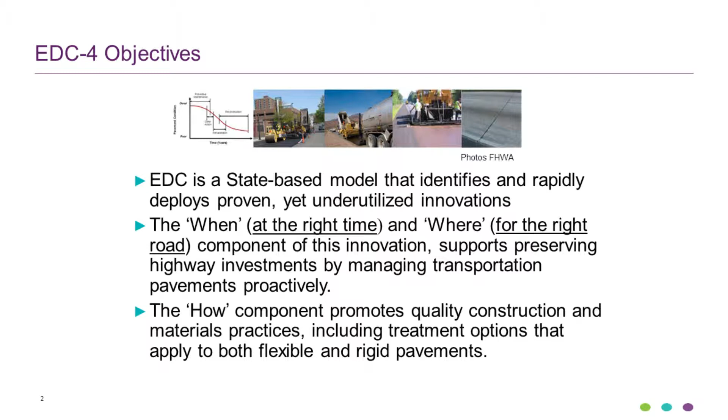Back to the objectives, we really wanted to base this Every Day Counts initiative on state-based models and identify a rapidly deployed proven technology. Pavement preservation is already a proven technology, but yet underutilized - whether it's specification related, training, or construction related issues - and we really wanted to push Every Day Counts on when and where to assist with this.

When and where - when is the right time and where is the right road. These are things most agencies struggle with. So that's the direction we went, as well as the how-to component to promote quality construction. Oftentimes when projects failed, we never did them again, so that's why we're going back on the how-to, to try to correct those actions.

My emphasis here is on web-based training. Everybody likes going to day-to-day trainings, but with our young millennials coming in, people need some kind of web-based training they can do on their own time. That's really our focus.

4 or 5 years ago, Federal Highway worked with ISSA and created the preservation training for our asphalt pavements. Great course, I can't say enough - get a chance, go to this website. It's excellent, not very long. People can take it on their own time, and it's a great source. A lot of innovations, a lot of photos. We spent a lot of time and money creating this course, so I really recommend it.

Back to what I'm supposed to talk about - the concrete. We went another direction, wanting more of an NHI type of training class. Oftentimes NHI courses cost money, but guess what - we're not charging anybody to take this training. Right now we're going through Adobe Connect issues because we're about 95% complete, as our software isn't compatible with the person that constructed it. We're getting those things taken care of, and hopefully soon this will be out for people to take, free of charge.

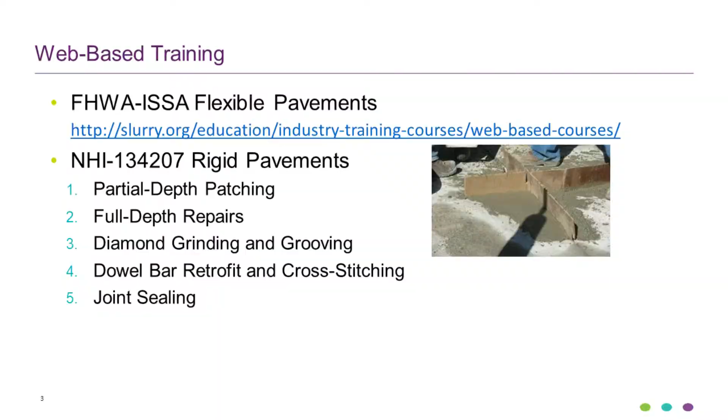All you've got to do is Google search NHI 134207. There may be A, B, C, D on different things, but they're out there. What will they cover? Partial depth patching, full depth repairs, diamond grinding and grooving, dowel bar retrofit and cross stitching, and joint sealing. Each course will be an hour and a half long, and they're very useful, very friendly. We're also working on a Spanish version, and this will be out in the near future as well.

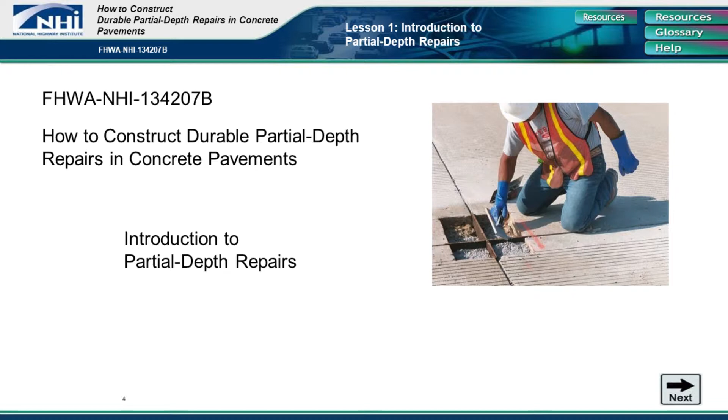So let's just take one of those - as you can see, partial depth patching. Let's go into it a little further. Here's a bit of the first slide, once they get into this web-based training website - this is often what the person will see when they get into it.

The first part is more of an introduction - it's lesson number 1, about partial depth. A little bit about the background - why did we choose partial depth repairs? We want to make sure we're using the proper techniques, giving them the background of when to apply partial depths and why to use them on that particular distress we're having in our concretes.

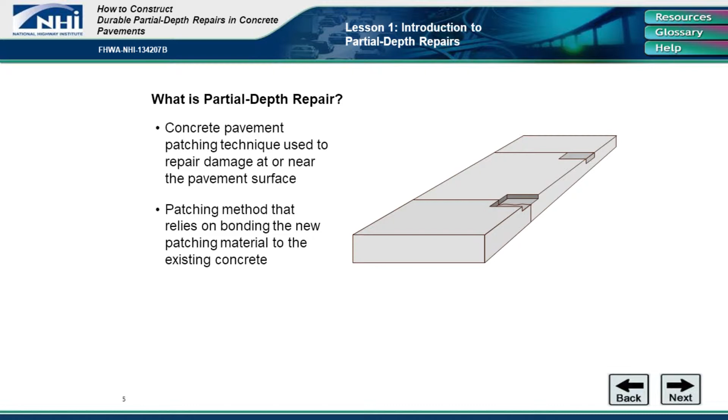So that's a little introduction. Then we go into what is partial depth repair - basically that technique to repair the top one-third of the concrete pavement. Then it goes a little further, on what types of pavements partial depth repairs can be used on. They can be used on jointed, reinforced, or concrete overlays themselves - it's not specifically one or the other.

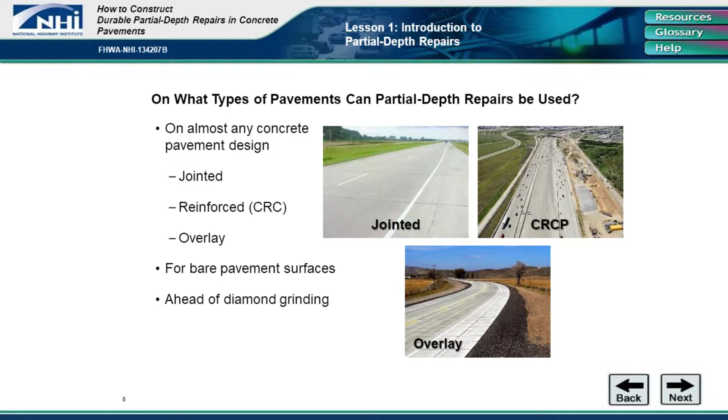For bare pavements, as well as ahead of diamond grinding techniques, then we talk about the problems of partial depth repairs.

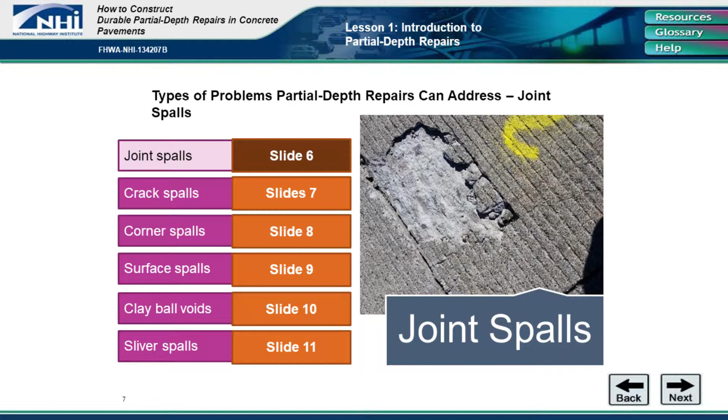Oftentimes, it's the incompressibles that get into those joints—the sand, the fine materials that get in and break up that material, and that's why we have partial depth repairs. As you can see here, this is each one of them that we talk about within this first course. We talk about joint spalls, crack spalls, corner spalls, surface spalls, clay ball voids, and sliver spalls. Who would have thought there's so many differences?

But we cover each one of them. We talk about best practices for each, in addition to the types of problems partial depth repairs can address effectively.

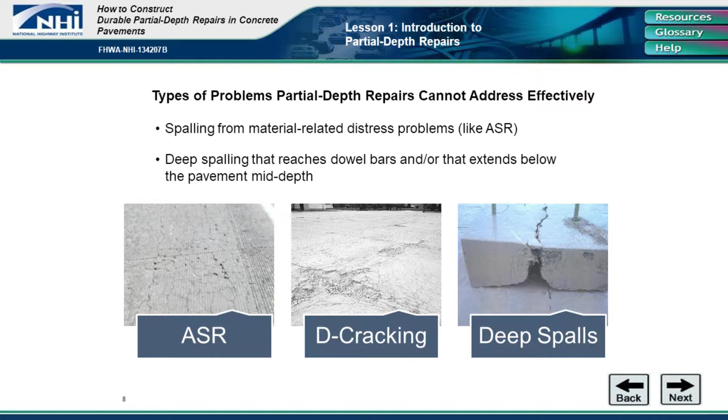For those inspectors that may or may not know this, do we need to do any partial depth repairs when it comes to ASR issues? Probably not a good candidate, as well as D-cracking, and not to mention deep spalls. If we've got something going down enough of that concrete surface, probably not a good candidate to choose.

As well as the inspector working with the contractor—we talked earlier today about quality. This is the first phase where we really emphasize quality into a particular project, by the engineer working with the contractor at the beginning, looking at assessing deterioration. The best engineer can identify the repair types, but it takes that workability to work with the contractor to itemize specifically what this partial depth repair will fix and what won't.

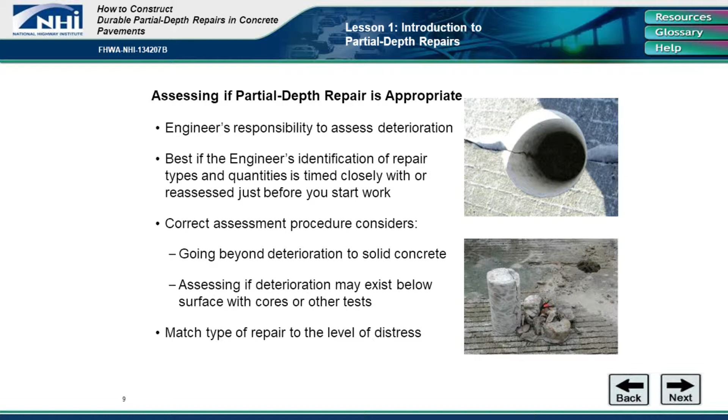Correct the assessment procedure considerations, going beyond deterioration, as well as going out and taking a core on top of that crack to see if it's coming from the top or from the bottom down. That's the things we want to look into when repairing those distresses.

Next, we have a little bit of scenarios—a little skit for the millennials. For this particular one, we have an inspector called Martin. He's going out there and he's going to look at these spalls and corner breaks. We give an opportunity for the inspector to choose what are the best candidates for partial depth repairs, and then we give them a chance to choose.

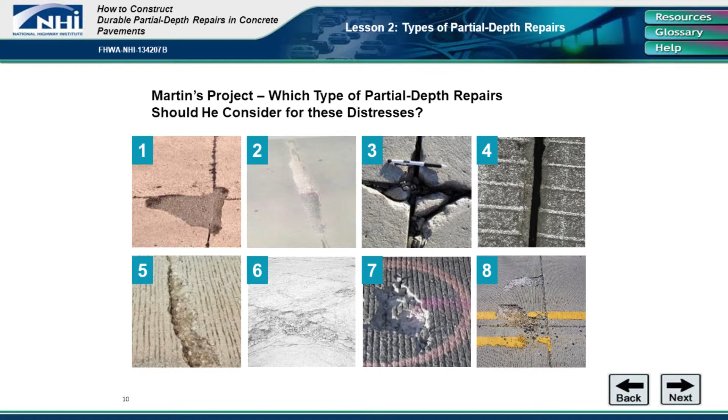And if you're playing along with this game show, you would see number 4 and 6 wouldn't be the most appropriate ones to do partial depths on.

In review and discussions with project inspection checks with the agencies, understanding that inspector prior to going out, knowing what they need to understand before the work gets done, is very important. Oftentimes we know they're going from one project to another, but understanding why they're going out and doing this is most important—having good project experience as well.

Knowing that the partial depth repairs are durable and perform well in a long-term strategy. Then, what is the agency's value? Well, their value is to adhere to those materials and equipment procedures. It's in their specifications, and that's what we talk about as well.

And then measuring quality indicators—what tests are they going to go into to validate the materials that are going to be used for those partial depth repairs? Things to consider.

As you're taking along these lessons and learning, you'll see 3 icons in the top right-hand corner talking about resource, glossary, and help. The resource has documents you can go into for further details on a specific item, as well as a glossary of pertinent terms. Then at the bottom, you'll see a paper clip—for this particular one, in orange, it'll be a PDF checklist available for further information for the inspector. So again, a very useful tool.

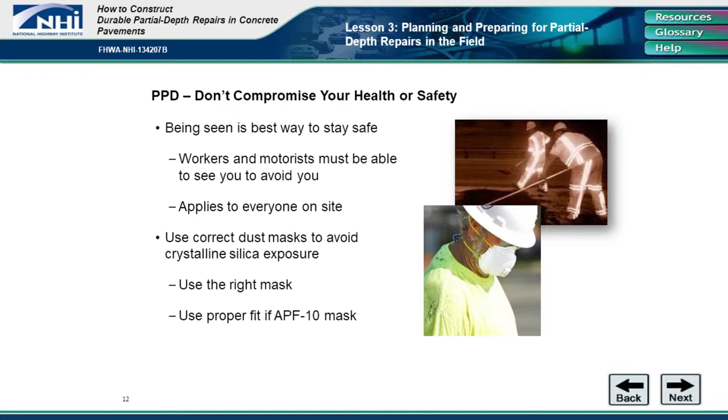And then when we're talking about especially concrete, what about those silica fumes and all those other things that are going to come up in the air? We want to make sure we talk about the APF number 10 masks that the workers are using, and nighttime construction, making sure they use the proper vest. We have 4 or 5 slides that go into more detail about that.

It aligns those inspectors to be well qualified when it comes to each one of those, so again you don't compromise your health and safety. That's very important, and we talk about that on each one of these preservation treatments.

As well as, what do we do if the boundaries of the mark are incorrect and job quantities do not match? Well, oftentimes early on in the projects we all mark them out, but then during construction they modify a little bit, change a little bit, but they're never consistent. Here in this section, we talk a little bit about it and how to properly mark it off.

We suggest a walk-through with the engineer to reassess what those conditions are, as well as make note that the project as-built drawings, for areas that have changed. We want to make sure we take that back to those designers so they understand what maybe they can do next time when it comes out to do one of these projects.

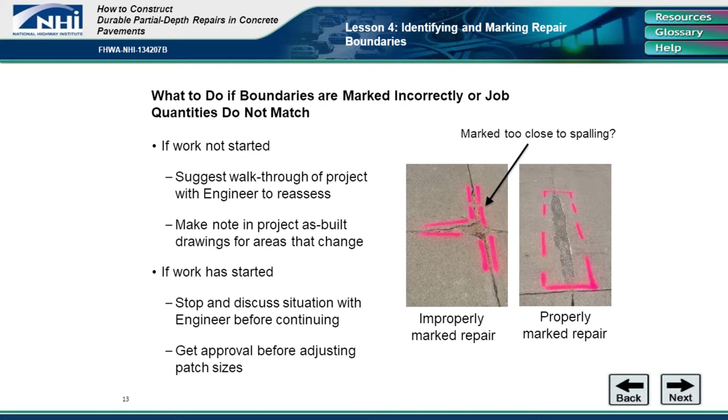Lastly, if work has started, we want to stop and discuss the situation with the Engineer, talk to them a little bit about it, and then get some kind of approval before adjusting. This is lesson 4 of identifying and marking the repair boundaries.

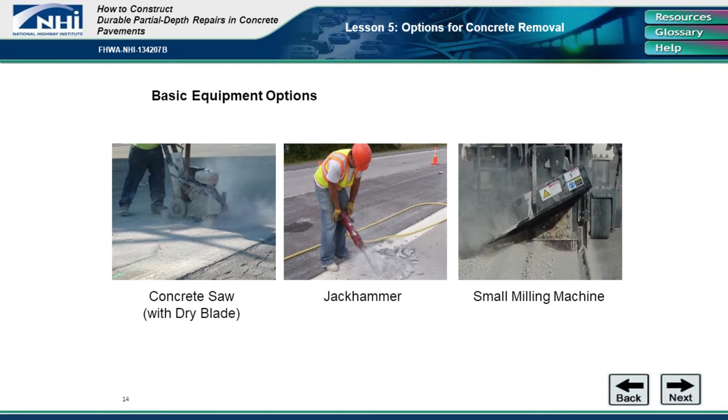Next, in lesson 5, we talk about the options for concrete removal. There are 3 different types that are often used: the concrete saw, jackhammer, and small milling machines. Very critical, we go in depth on each one of them, and it's very helpful.

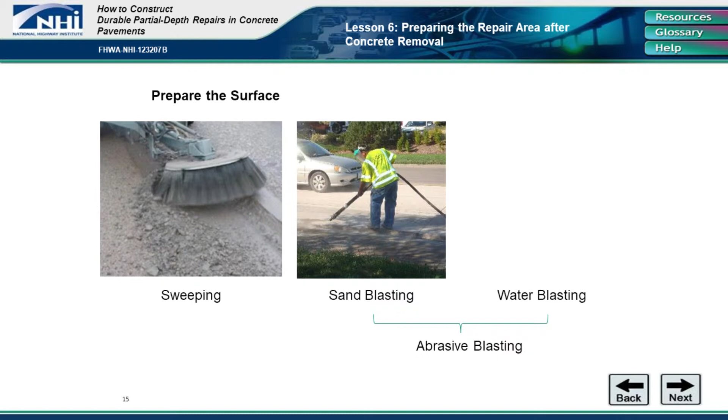In lesson number 6, we prepare the repair areas after concrete removal. First thing, we want to make sure we go out there and sweep them correctly. Then after that, we do some kind of sandblasting or water blasting. Oftentimes water blasting is probably the most appropriate, and the reasons behind that are less environmental dust and things like that.

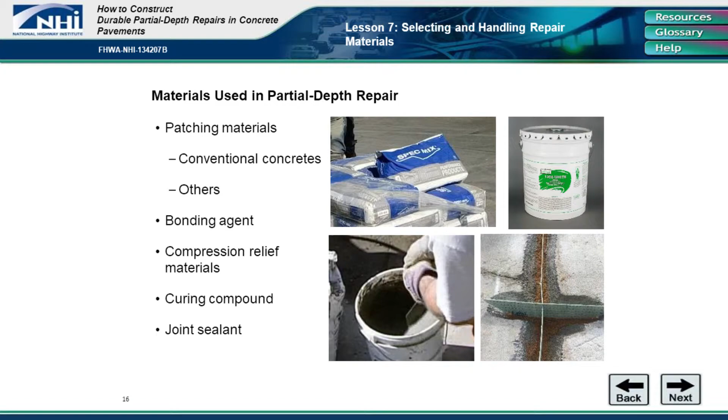Lesson number 7, selecting and handling the repair materials. First thing we talk about is the patching materials - probably the most important, that doesn't get enough information, doesn't get enough emphasis.

Next comes the bonding agent. Depending upon the material that's used, it's sometimes used, sometimes not. But again, how does one go about selecting what type of bonding agent? We talk about it. Also, we go into the compression relief materials, the curing compounds, and lastly, look at the joint sealing materials.

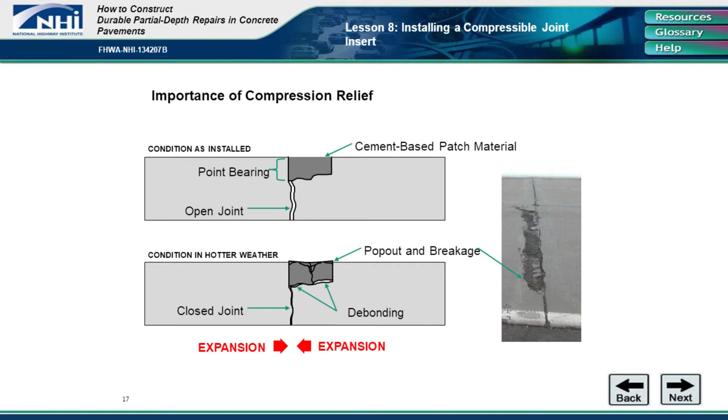Next, we talk about compression relief. Oftentimes when we had failures with concrete on the longitudinal joints, compression was the main factor and reason why the partial depths were the problem. However, now we have some compression relief techniques, standards that inspectors can use to assist them in that effort. And in addition, we go beyond that - we talk about ways to improve it in the web-based training.

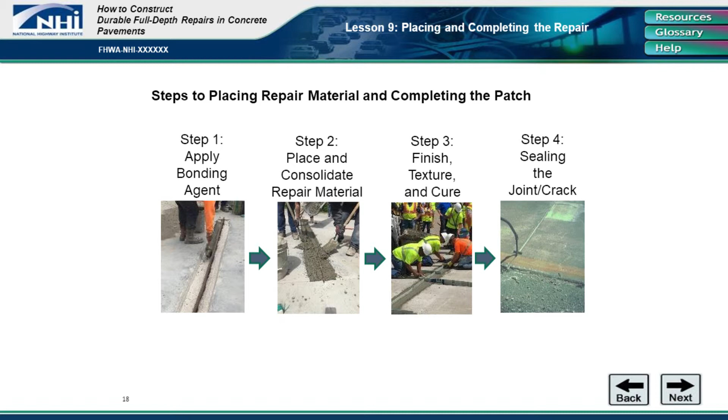Then the next steps on placing repair materials is completing the patch. As you can follow along: step 1, applying the bonding agent; number 2, place and consolidate repair materials; number 3, finish, texture, and cure; and lastly, seal the joint crack. Pretty straightforward - we go in depth on each one of them.

And as you can see, the little boxes on the bottom - back and next - just work like if you're taking the web-based training right now.

The importance of the quality checks - we want to make sure it's done correctly, done properly. And then with that, we're going to get better performance in the long run, and everybody's going to be happy.

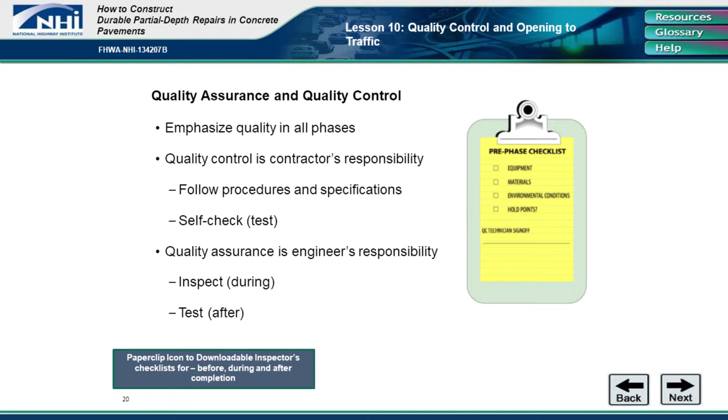In addition, lesson 10, we look at quality control and opening to traffic. The emphasis again, as we start early on, is making sure we had the quality that's needed early in the process. We talk a little bit about who's responsible for quality control, as well as quality assurance.

And for the agency, you want, as the quality assurance, to inspect during construction and have some kind of testing that validates they're within compliance. Here are some resources where you can go for further information.

In addition, there's a federal aid essential video that's used on concrete pavement preservation. It's a short 7-8 minute video that kind of helps improve, and also communicates the effort of what we're trying to get out of this. A little bit earlier today, I heard some issues with ADA.

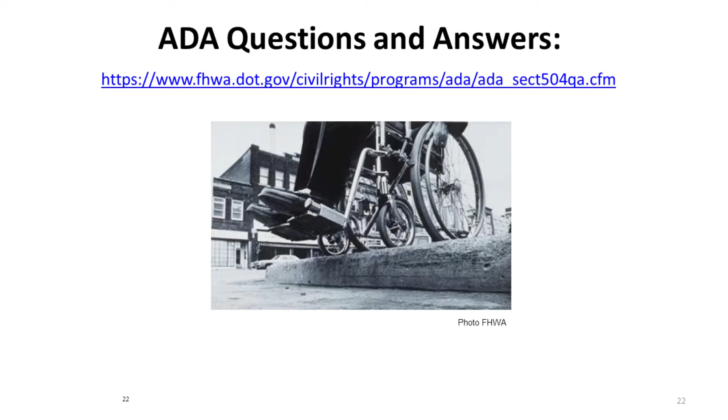It provides a lot of useful information for an agency, what they need to do about a transition plan, and so forth. What was the target date for the release of that webinar?

Is that a TBD kind of thing? No, you go to web-based training and go to the NHI site. I'm hoping within the next month it'll be available. And again, you're going to go in there, they're going to ask you - hopefully not ask everything about you - your name, where you work, some phone numbers, and this and that. And then you'll get access, and then they'll send you a site where you can go to watch it, and away you go. So it should be pretty straightforward.